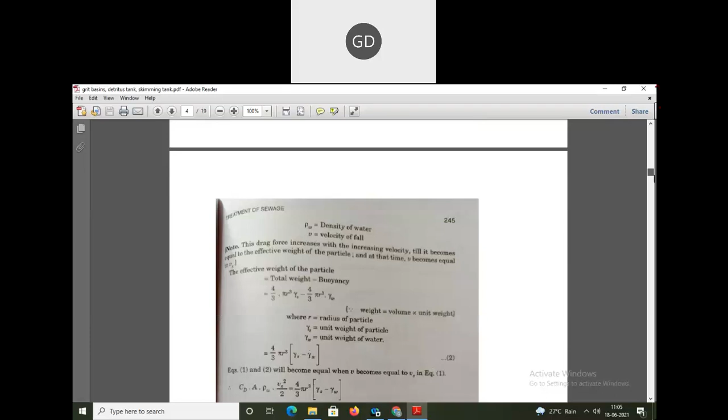So the next one is, if the diameter of the particle is lying between 0.1 mm and 1 mm, then you will be using this equation: Vs is equal to G, capital G minus 1, by 13.88, D to the power 1.6 by nu to the power 0.6, whole to the power 0.714. So this is your equation for when D is lying between 0.1 mm and 1 mm.

Next one is for turbulent settling, when the diameter of the particle size is greater than 1 mm. You will use this equation: Vs is equal to 1.8 root over Gd, G minus 1. So this is your equation for D greater than 1 mm, and this equation is given by Newton. It is given by Newton's equation for turbulent settling.

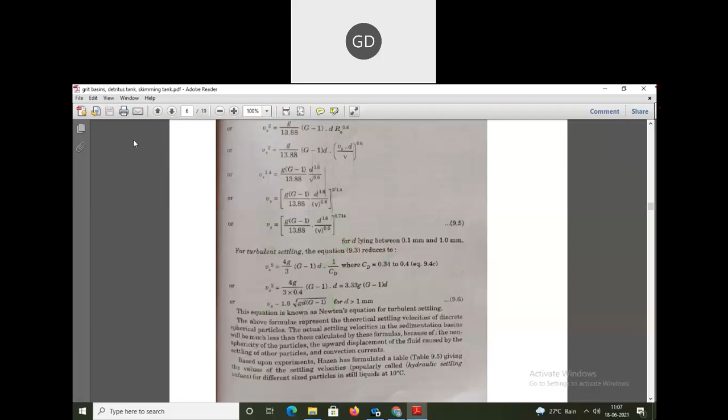So these three equations you have got for your settling velocity.

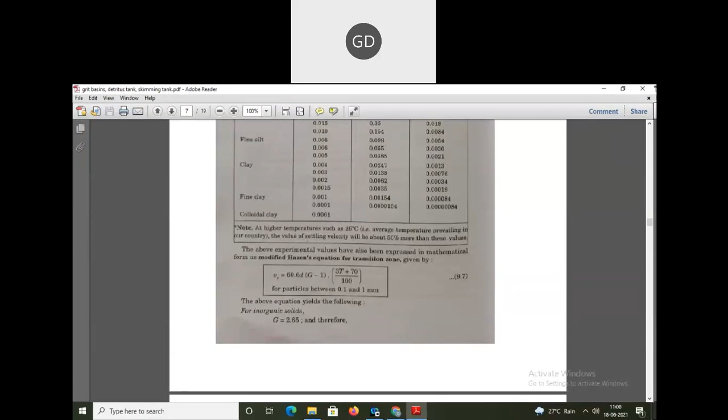Another equation is there, known as the modified Hazen's equation for the transition zone. So if it is in the transition zone, like I told you, when the particles are between 0.1 and 1 mm, Hazen gave another equation that is this one. This is another equation you can use when the particle size is lying between 0.1 and 1 mm.

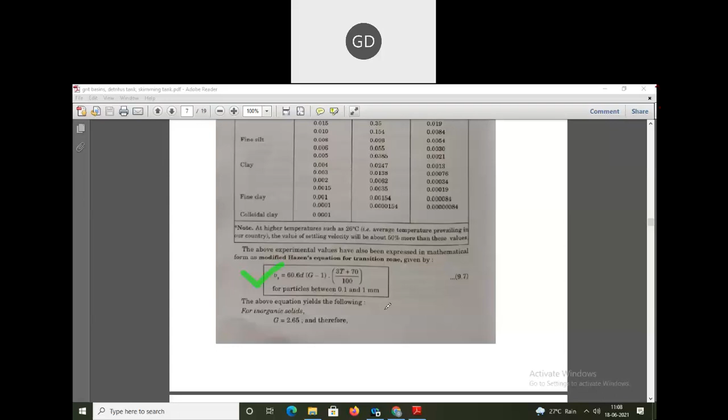Now coming to the grit chambers and the grit channels. As I already told you, the grit chambers are the sedimentation basins, and they are placed in front of the wastewater treatment plant. They are usually placed after the fine screens, so after the screening process and before the sedimentation tank, the grit chambers are provided.

These grit chambers, as already told, remove the inorganic solids, like the grits, the sands, the debris - so all those things they remove, the sand and the non-putrescible things.

The amount of grit that is collected has some range. The grit quantity may vary between 0.004 to 0.037 meter cube per 1000 meter cube of sewage for a separate sewerage system. You can note these things down in your copy for numerical purposes. While this may range between 0.004 to 0.180 meter cube per 1000 meter cube for a combined sewage system.

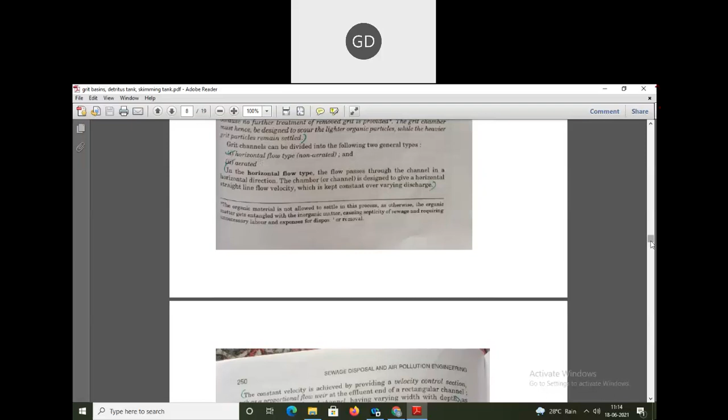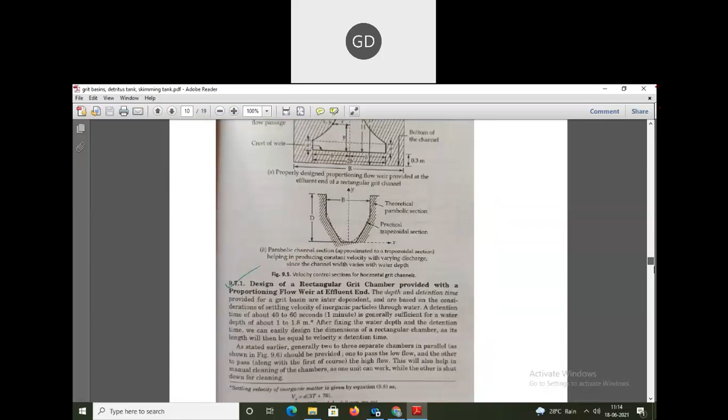So the next one is... okay, let me see.

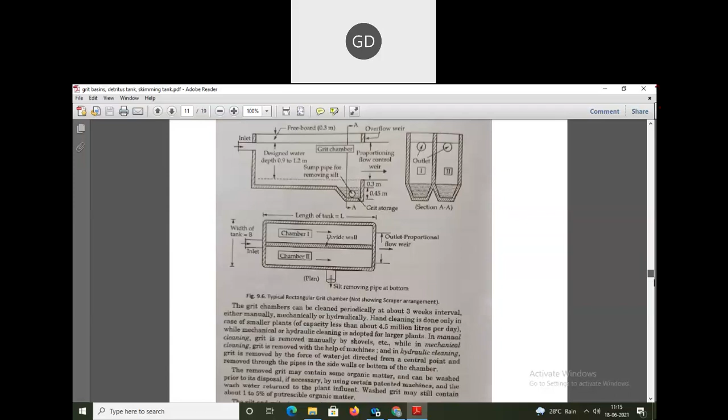Okay, so we can do one numerical now before proceeding to the next topic. In this numerical, since this is a design problem, there are different types of design and there are some fixed values which you need to remember. Let us first see this numerical.

This numerical says: a rectangular grit chamber is designed to remove particles with a diameter of 0.2 millimeter and specific gravity of 2.65. The settling velocity for these particles has been found to range from 0.016 to 0.022 meter per second, depending on their shape factor. A flow through velocity of 0.3 meter per second will be maintained by a proportioning weir. Determine the channel dimensions for a maximum wastewater flow of 10,000 cubic meter per day.

So here, what things are first given? They are talking about a rectangular channel with a proportional weir provided for controlling the velocity of the flow. We just learned the proportional flow weir is provided to maintain the flow velocity. So what is the first value given? The horizontal velocity of flow is given as 0.3 meter per second.

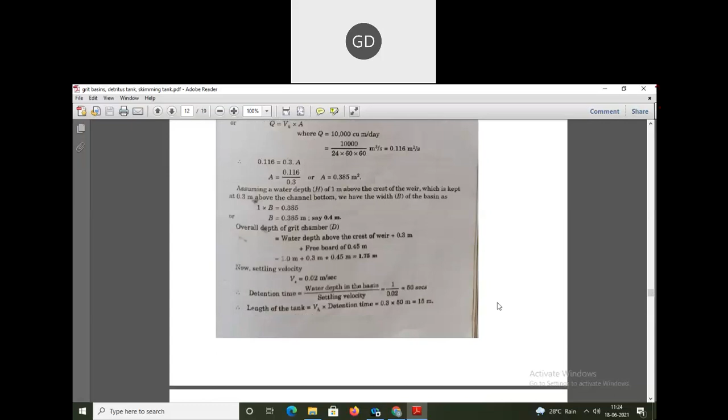So this is 9.2a, where they asked to find out the channel dimensions. Everything is obtained: the width of the basin, the overall depth of the basin, and also the length of the basin. So finally the numerical is solved.

Okay, so that was another tough one.

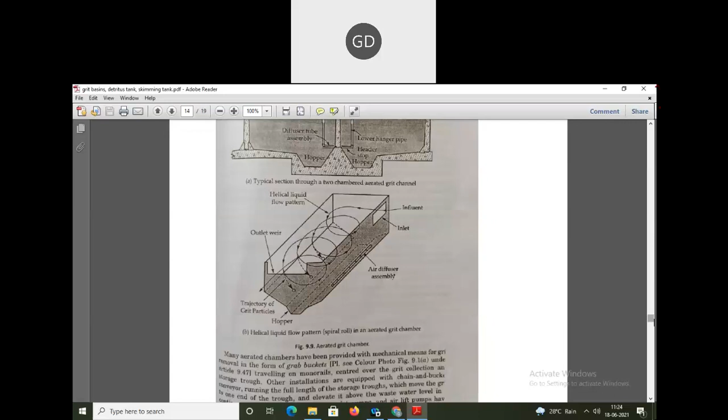Next we have aerated grit channels. Let me see if I can find some video of aerated grit channels so that it will be easy for you to understand. Just give me a minute.

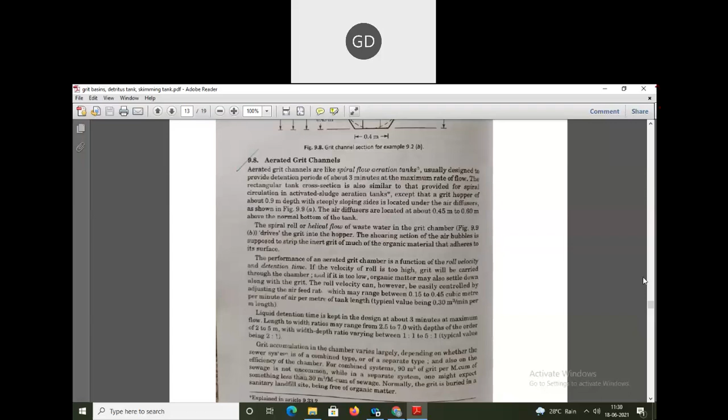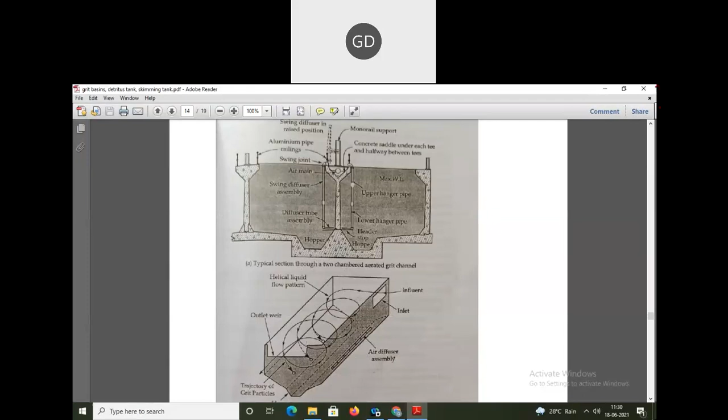Okay, here you can see, this is a hopper, and they have some air diffusers. These are the spiral type of things, and this is the air diffuser assembly. So this is a typical section of this aerated grit chamber.

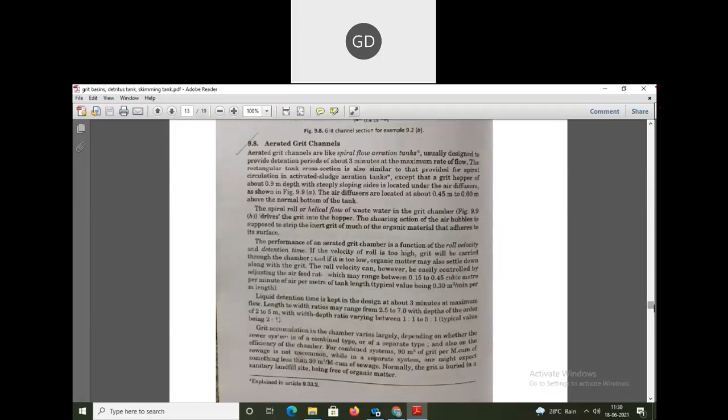Here basically the performance of this grit chamber depends on the roll velocity and the detention time. Since it has a spiral type of circulation, if the velocity of the spiral or roll is very high, the grit will be carried through the chamber. And if the velocity is low, the organic matter will settle down along with the grit.

And the air feed rate ranges between 0.15 to 0.45 cubic meter. The detention time, as I told, is 3 minutes at the maximum flow for designing purposes. Then there is the length to width ratio — while designing, all these values are important. The length to width ratio should range between 2.5 to 7, and the width to depth ratio should be between 1:1 to 5:1.

So basically it is an aerated grit channel — air diffusers are there, so therefore the name comes that it is an aerated grit channel. The detention period here is a maximum of 3 minutes, and also there is a grit hopper. So there are different types, one is the horizontal flow type, and another is the aerated grid channels.

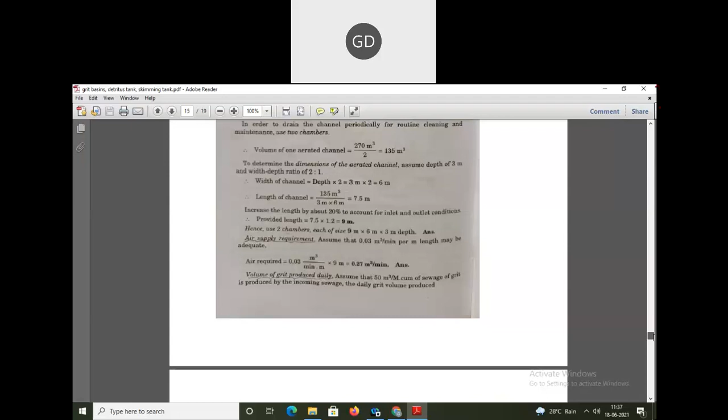Now, since in your aerated grit chamber we are giving an air supply, what is the air supply requirement needed? You can assume it to be 0.03 meter cube per minute per meter length, which is adequate. Remember this value, it is fixed for design purposes for the aerated grit chamber. So the air requirement you get is 0.03 multiplied by the whole length, giving 0.27 meter cube per minute.

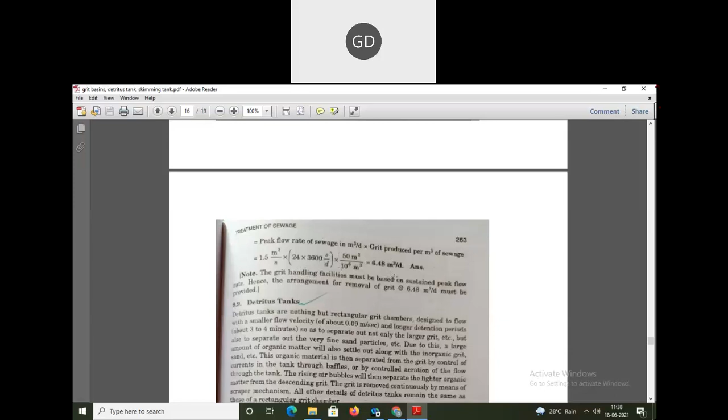Also, you have to find out the volume of grit produced. We assume the amount of sewage grit produced is 50 meter cube per million cubic meter of sewage produced daily. The formula is peak flow rate of sewage multiplied by grit produced per meter cube of sewage. Multiplying peak flow of 1.5 by the grit value of 50, which is in million cubic meters so 10 to the power 6, and converting peak flow to seconds per day, the whole thing gives 6.48. So 6.48 meter cube per day is the volume of grit produced daily.

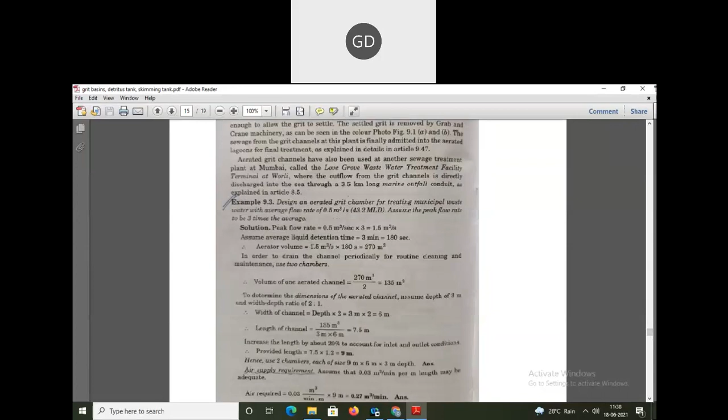So this is about the aerated grit chamber. Next class we will be doing the detritus tank and the skimming tanks. I hope everyone has understood, and if there is any problem, you can ask me later. If you go through it once, I will share the PDF with you, and after that if you have any problem, you can ask me.